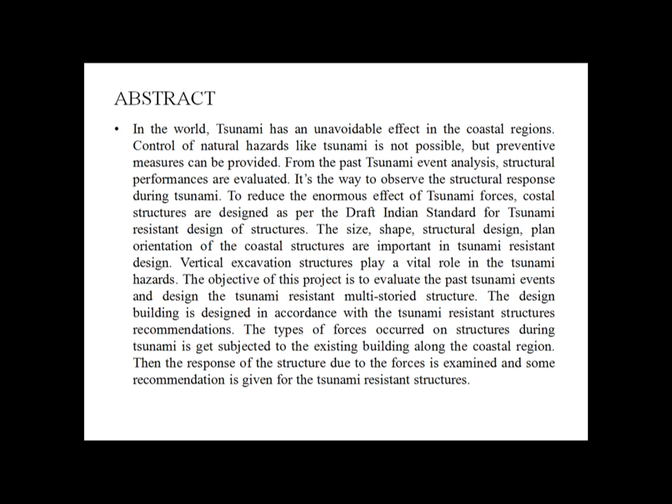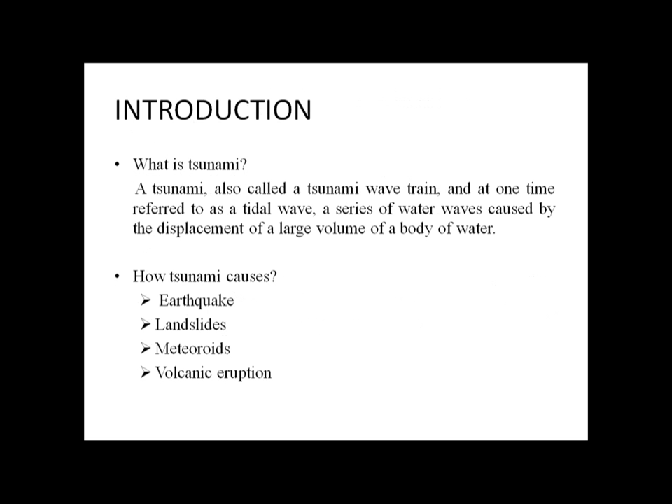Introduction: a tsunami is a series of large waves generated by a sudden displacement of a volume of water, caused by earthquake, landslide, meteoroid impact, or volcanic eruption. The wave characteristics have long wavelength and period, and the crossing distance time is a few minutes to hours. When comparing tsunamis and earthquakes, not all tsunamis are caused by earthquakes; there are some other criteria, such as the epicenter, and faults may also be a cause.

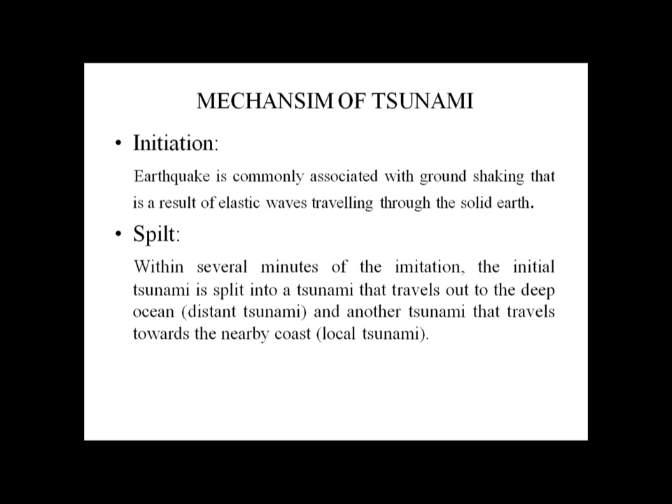Literature review: Investigation of behavior aspects of tsunami-resistant structures by Palaniappan studied tsunami-resistant design through inspection, including a model study on a seashore near the coast. They studied pressure variation due to tsunami loads, behavior of building foundations under tsunami loads, and the effect of building shape. They concluded that circular buildings are more effective than others, and more openings are advantageous.

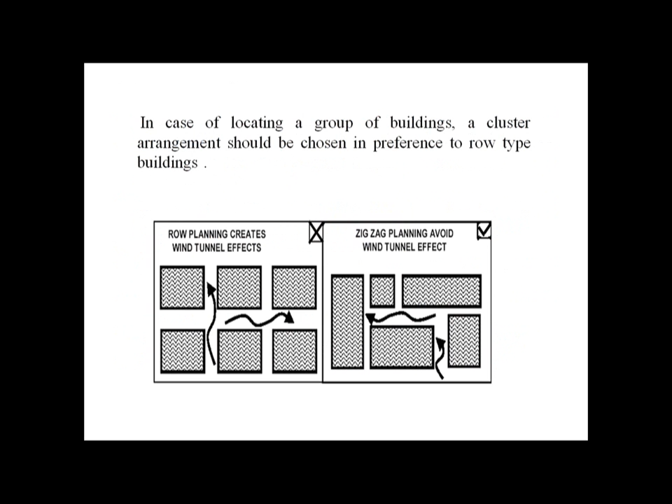Another literature review, on dynamic wave forces of tsunami acting on structures by Suguru Mizutani and others, measured the wave forces of tsunami acting on preventing structures by identifying 4 types of wave pressures: dynamic, sustained, impact, and overflowing. They concluded that impact and overflowing wave pressures are more significant than dynamic and sustained pressures.

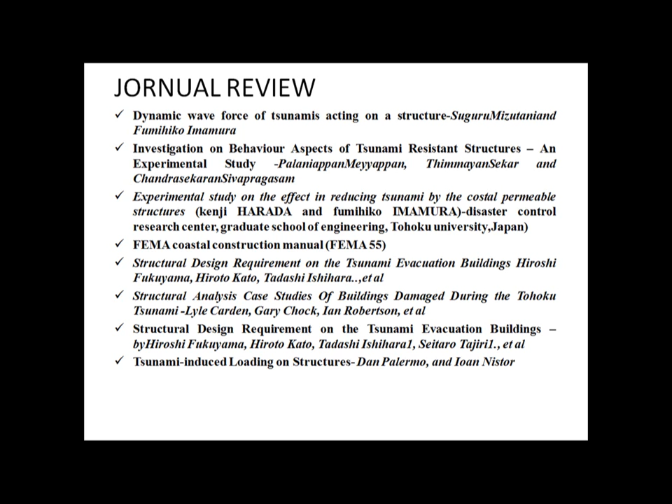We calculated 6 different forces: hydrostatic force, hydrodynamic force, buoyant force, impact force, and breaking wave force. We applied 13 combinations of these loads and forces along with dead load, live load, and other loads, and subjected them to STAAD analysis.

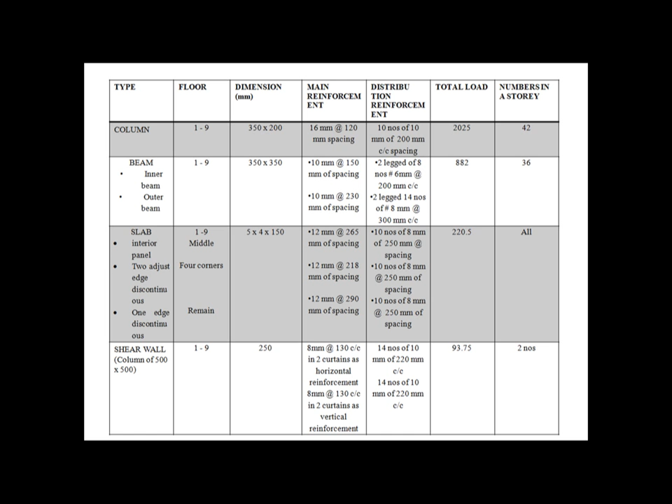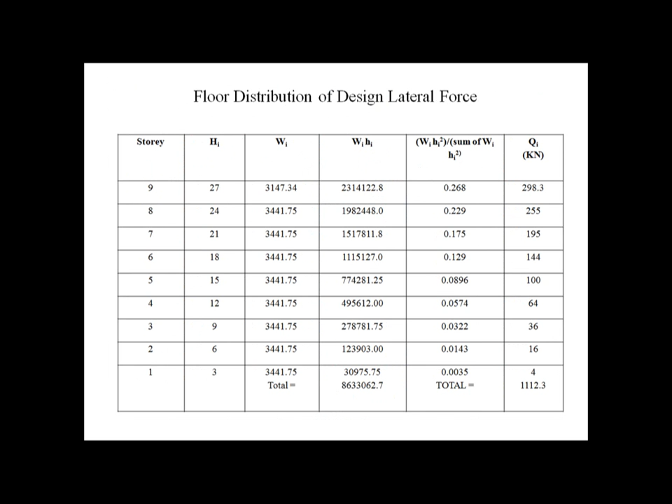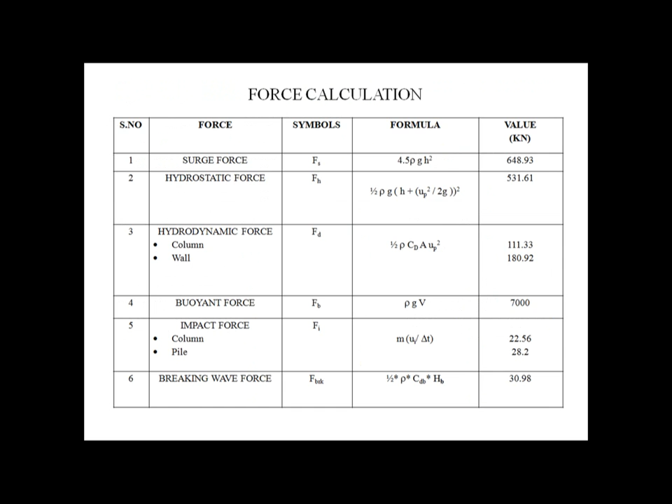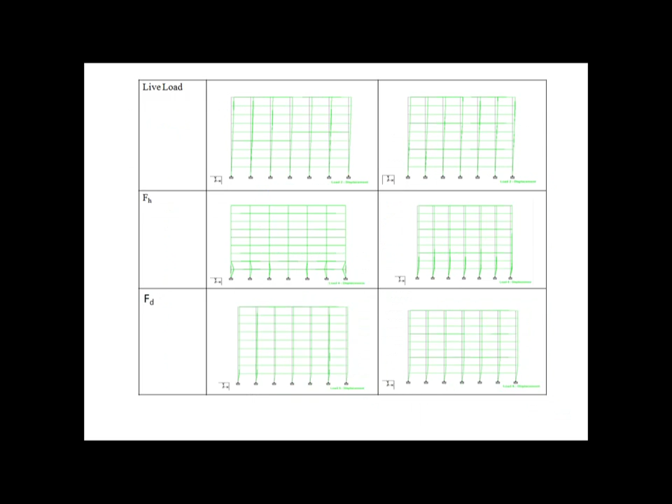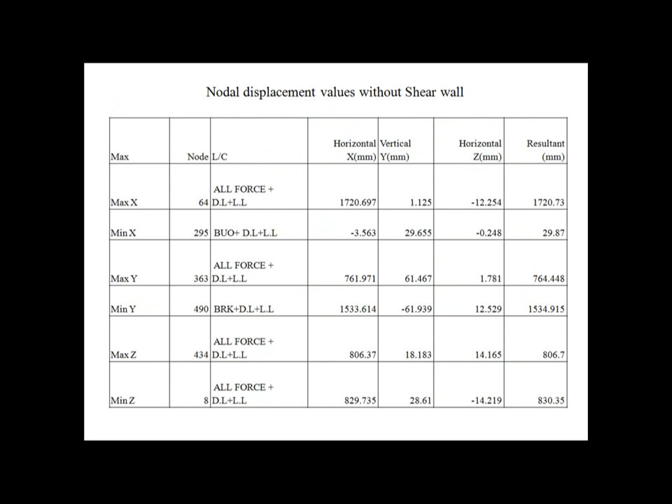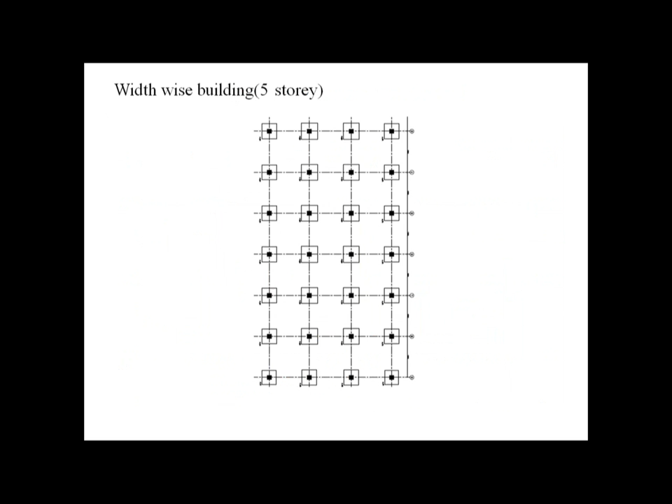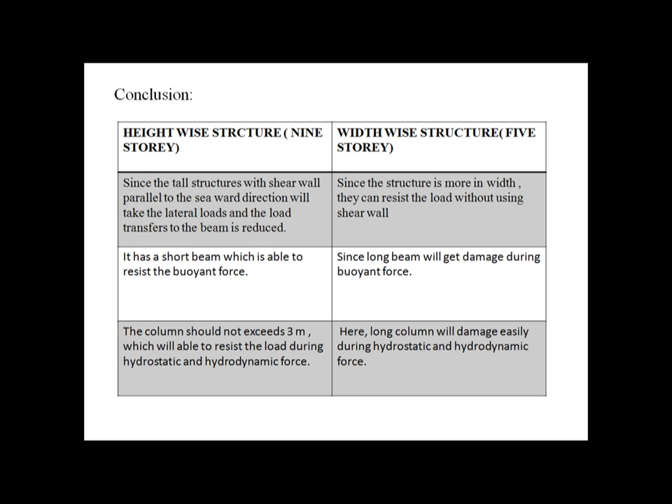In the existing building, since its direction is lengthwise in the Z direction, the building is unable to resist the loads; since it has long beams and long columns, it can't resist the buoyant, hydrostatic, and hydrodynamic forces. In our design building, we provided 50% openings so water can flow through the building easily.

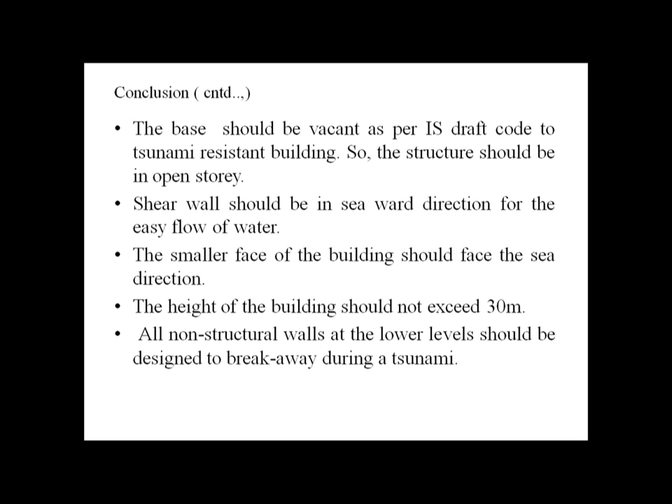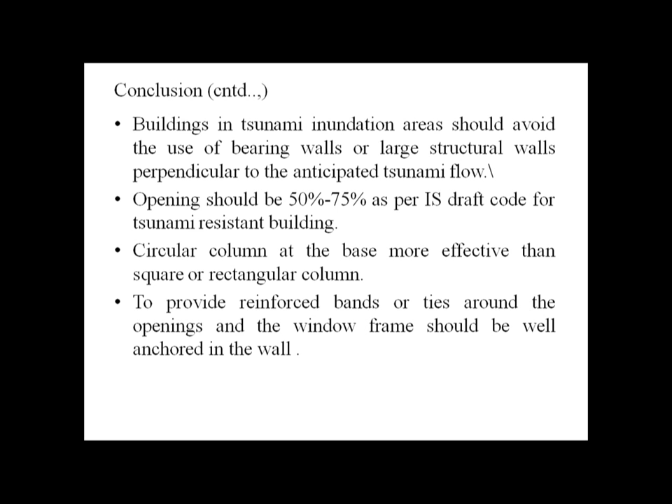Bearing walls are not used as per the IS codes. The height of each story in our building is 3 meters, not exceeding 30 meters total. In the existing building, the height of each story is 5 meters, so failure of the wall may occur. A circular column is more effective than square or rectangular columns, and each door and window is anchored with the wall.